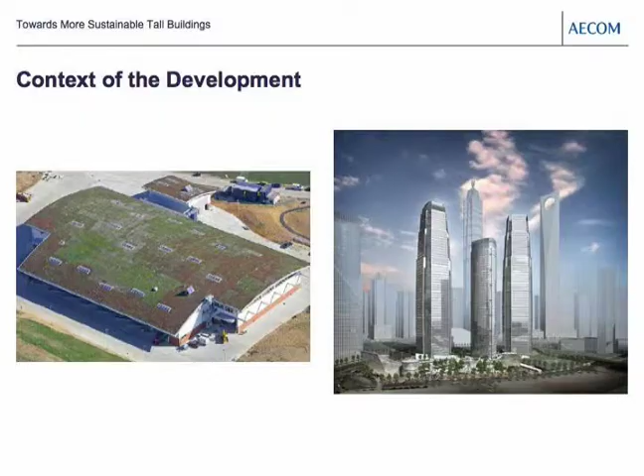On the right, obviously a tall building situation is seen as being less sustainable. In many parts of the world, rapid urbanisation and the need for more resource-efficient cities, combined with land use and transport constraints, means that high-rise solutions can be argued as the only sustainable answer to the need to accommodate large numbers of people within easy access of public transport links.

As such, the development context is therefore key as to whether tall buildings are sustainable indeed. Given this overriding position, what we've got to then determine is how sustainable a particular tall building development can be. In 2002, as Anthony mentioned, AECOM produced a groundbreaking review of tall buildings and sustainability for the Corporation of London. Since that time, of course, globally, there has been a significant change in approach, resulting in many more discussions and solutions of sustainability for tall buildings.

This presentation this morning considers the key drivers of sustainability in the UK, recognising that many of the situations there are now being passed around the world. It identifies major challenges in delivering these sustainable tall buildings, both from a design and operational perspective, and reviews examples of how to achieve sustainability in practice.

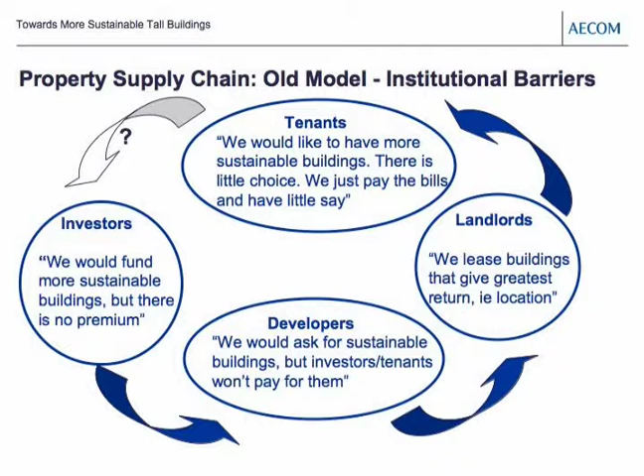If we consider the typical model that was the property supply chain in recent years, traditionally one of the major barriers to adopting a more sustainable approach to tall buildings has been the way in which the various supply chains interact. There are different investor, developer, landlord, tenant relationships, and traditionally tall buildings have often been occupied by a number of tenants, and sustainability has not been the key issue.

Investors are usually looking at short-term returns when it comes to property investment decisions, and they're also being influenced by developers whose focus is on current market rates, as opposed to what may happen as a differential rate where they were looking at a green solution. Developers may well wish to invest in green buildings at that time, but they saw limited financial advantage in doing so, and therefore they also saw the potential of additional risk.

Landlords were driven largely by financial returns offered by a particular building, and tenants who wanted perhaps a green solution were often then constrained by their operation requirements and physical location. I'm pleased to say I think the move in the most recent years is seeing advances in this approach.

In the UK, the government over recent years have been very active, introducing a number of legislative initiatives aimed at addressing key sustainability issues such as energy use and carbon emissions. The documents here are some of the many planning and regulatory initiatives in recent years where AECOM has assisted the UK government with technical advice, helping to set the agenda. For example, the documents are planning and policy statements, Building a Green Future, and Part L building regulations related to energy emissions.

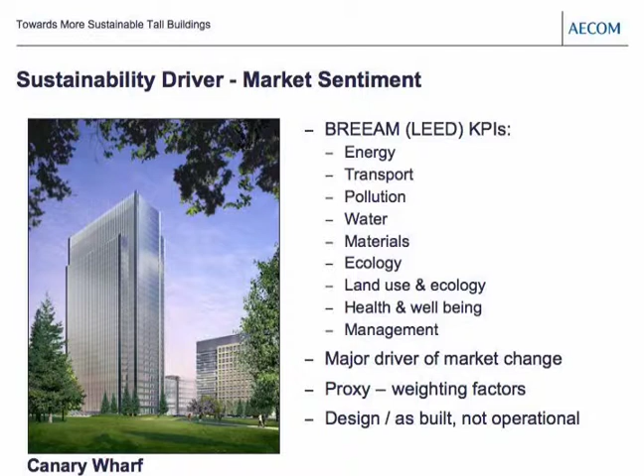However, the BREEAM situation has now developed so that we now check whether the completed building has actually implemented the design features. BREEAM, however, does have some constraints, and there are three. The first is that they are based on a point scheme from the KPIs listed here: energy, transport, pollution, water, materials, ecology, land use, health and well-being, and management. However, there is no particular importance given to any of these issues for a specific site.

Professional practice has not stood still during this momentum shift. And indeed in Europe, I think they've been leading the charge. AECOM has recently helped identify the sustainability requirements by producing this guide for the Chartered Institution of Building Services Engineers. We've also done some work with the HVCA, that's the Heating and Ventilating Contractors Association, on a strategy guide for the industry, and for the RICS, the Royal Institution of Chartered Surveyors, on a sustainable policy for fit-out. As professionals, we can no longer say that we're just providing good practice. It's our duty to advise clients of the need for sustainability within their projects.

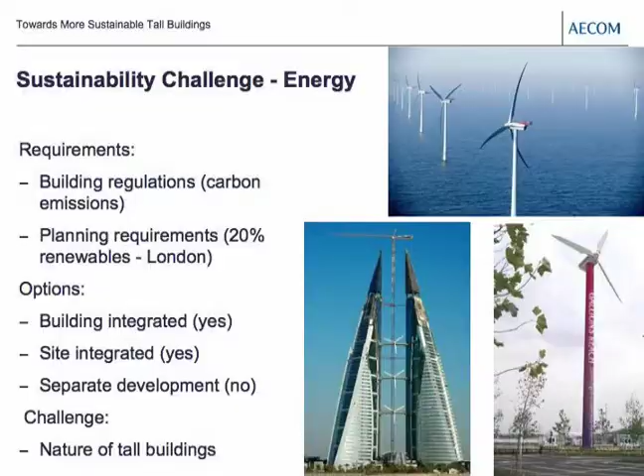Looking now at energy, there are two principal areas of requirements: building regulations, which are centring on carbon emissions in buildings, and planning requirements through regulation demanding 20% renewables from within new buildings. I think when we look at tall buildings, we will find that 20% renewables, as I said earlier, may be unrealistic, but we have to try.

At present, the regulations say that building integrated or site integrated renewables are eligible as part of the London Plan, but the development of far off renewables, for example those from wind farms offshore, would not be calculated within the 20% amount. At the heart of this decision is the vision that within the London Plan they wish decentralised power supply within the city, powered by renewables and low carbon sources.

Many argue against this policy. For example, the cost of reducing carbon emissions through building integrated renewables is often higher than developing energy from offshore wind farms in terms of pounds invested against tonnes of carbon saved. Experience in the UK so far has also shown that buildings with mounted wind turbines often deliver less significant energy supplies. If you can imagine a tall building in the conurbation, it's unlikely that the opportunity to put a wind turbine would exist in that situation.

However, going back to the London Plan, the rationale of insisting that 20% of the energy is from renewables on site is really that they wish to increase the whole process of energy efficiency and awareness, and also create greater innovation from renewable technologies.

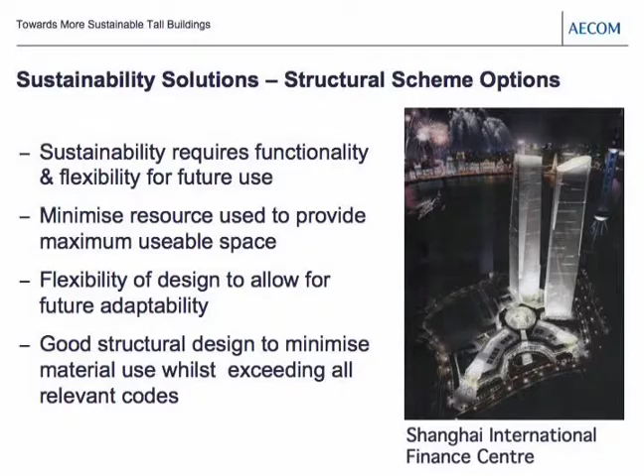If we then turn to some of the solutions. In Shanghai, there is a need for tall buildings because of the rapid urbanization and development. AECOM are the structural engineers on this particular project, the Shanghai International Finance Center. A key requirement of the building to be sustainable is that it meets its function requirements both now and the future. And the future also includes the situation surrounding climate change.

There are many ways the building can be made more sustainable, including energy efficient design, material selection, and overall approach to structural design. As a specific example of sustainability influencing structural outcomes, the following was examined. So, for example, our designers are looking at a range of opportunities, and we have tried to select arguably the most sustainable considered.

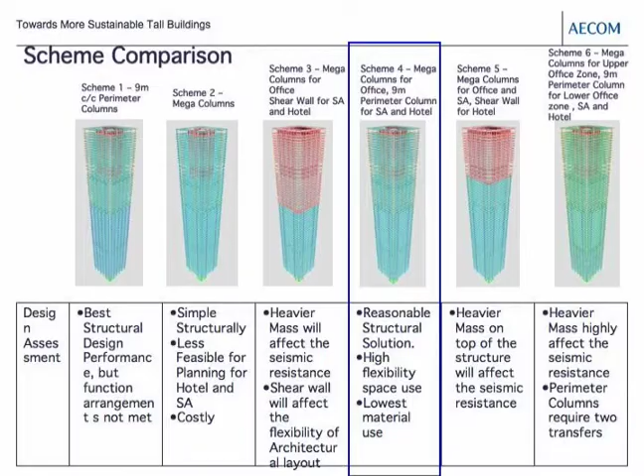I'm sorry you can't read this most probably from the back, but the reasons that we've selected this are: the design gives maximum flexibility in terms of use of the space. The amount of material used in the structure is much less with this option than with the alternatives. And overall, maximising the space and minimising material, whilst giving ultimate flexibility within the building, must be the most sustainable solution. It's also a win-win because lower material costs relate to lower construction costs.

There are obviously many more sophisticated arrangements in terms of selecting materials with lower or different environmental impacts. In the UK, for example, you could argue that the use of steel instead of concrete was more sustainable due to the issues surrounding cement production. For example, 1 tonne of cement in the UK is responsible for 1 tonne of carbon dioxide, whereas the production of constructional steelwork has a relatively low embodied energy because of its high recycled content.

Discussions of this technical nature are always complex. However, it is important to engage in the debate because sustainability is a mindset and we have collectively to find the correct solution. Another potential solution may be reuse of existing foundations. The top picture shows a piling foundation that has been isolated to allow testing before reuse. And below, one of the buildings where we have actually reused foundations, which was Barclays Bank headquarters in London.

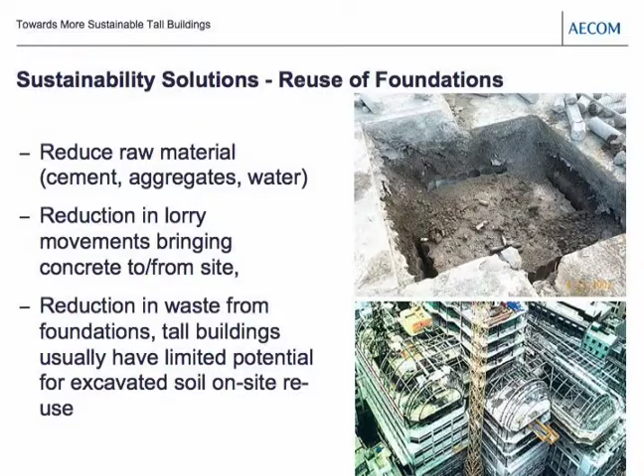Clearly there are limits to this approach, particularly with super tall buildings. The advantages where it's applicable are significant. Reduced material, fewer lorry movements, both of which reduce greenhouse gases. The disruption to communities and traffic movements are reduced. The reuse of foundations reduces soil waste, particularly important where tall buildings are concerned.

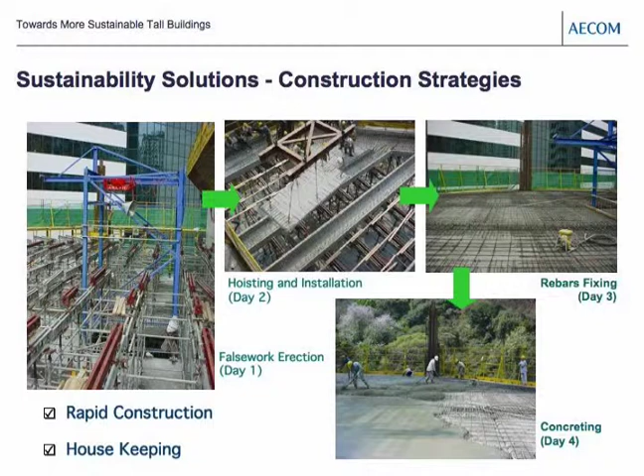Again, looking at the construction, sustainability is not just about energy use and carbon emissions. It's also about using our resources efficiently. Using these resources provides low energy results. This illustration shows a rapid construction technique that minimises material and waste through the use of prefabricated components that results in less waste, greater recycling, fewer journeys to site, all in all contributing to a more sustainable approach. This is only one example, there are many more.

Resource minimisation in construction is also key in tall building sustainable developments. It's essential that the final project maintains the function requirements of the client now and the future. And we have to evaluate the use of materials to provide the best space and the most comfortable living accommodation. Here is an example of a construction approach that aims to maximise the work area within the development.

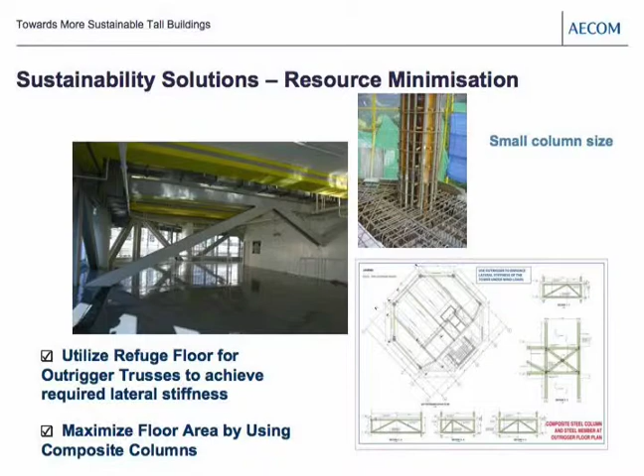Looking now to energy strategy. A development's energy strategy is key these days to meeting planning requirements in London and in many other parts of the UK. Where 20% of the energy is required from renewables on site, the technical opportunities and challenges for tall buildings are different from those found in low-rise buildings.

For high-rise buildings, detailed thermal modelling is needed to minimise energy use and to identify the glazing solutions that provide optimal balance between visual aesthetic, daylighting and solar protection. And the inherent complexity of design and the challenges associated with modelling local wind microclimate also affects the ventilation design.

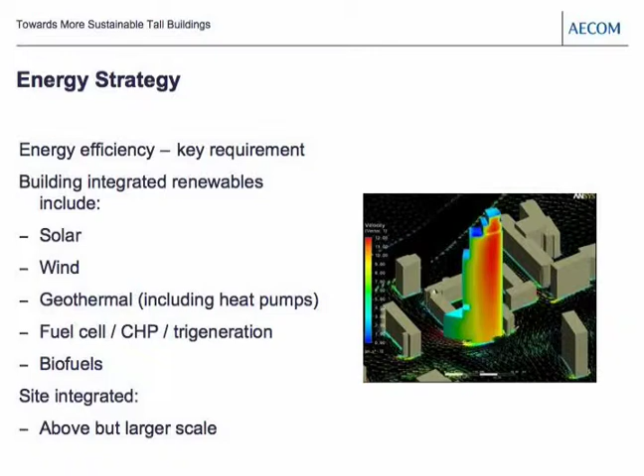There are a range of renewable technologies as listed here, including solar, wind, geothermal, fuel cells, CHP or trigeneration, and the use of biofuels. None are always going to be used on each project, and each project has to be looked at as to the benefits of the use of those renewable technologies.

Mechanical and electrical strategy is key, and we've been hearing a lot, I think, over the last couple of days about architecture and structural engineering, which is key to the success, obviously, of the tall buildings. However, I think it would be inappropriate if we were not to consider that holistic design of a successful building can only be done if mechanical, electrical, and public health matters are considered holistically.

Renewable energy strategy is just part of the building's energy strategy. The carbon emissions from a building can be most effectively minimised by excellent M&E design. It's essential to look at the M&E services and building integrated renewables as part of this holistic solution. Once the concept is developed, its implementation using various high-efficiency lighting, air conditioning and people movement systems, together with good control and management systems, is required to optimise energy use.

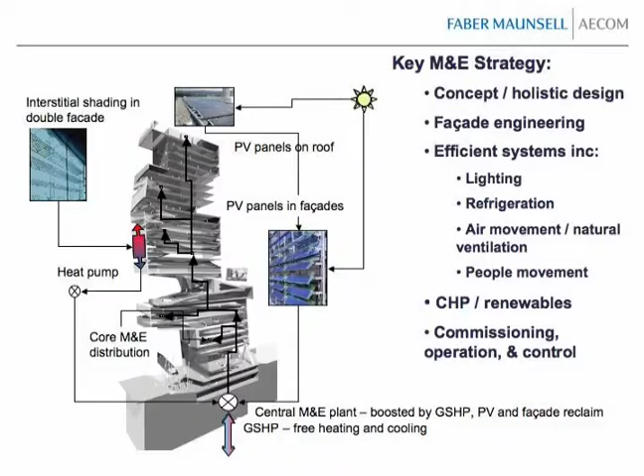And obviously, efficient commissioning and operational issues must be addressed at the design stage. This is an example of a building, cut through a building in fact in Dubai, where we were just doing an analysis of potential energy-saving renewable techniques.

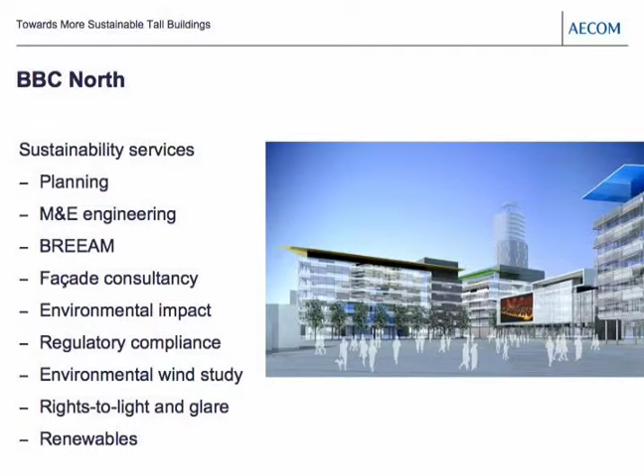Coming to a few examples, the BBC North. The BBC North is in fact a building based in Manchester, where sustainability is to be embedded in all of the mechanical, electrical and public health design and facade considerations from the project. AECOM have provided a range of sustainability services, including environmental facade design, energy and carbon assessments, sustainability consultancy, dynamic thermal modelling, computational fluid dynamics to assist our MEP design to meet their stringent sustainability challenges.

Extensive energy studies of all the buildings were undertaken using dynamic thermal modelling to predict solar gain, daylight levels and energy performance, which enabled an integrated building services strategy to be developed and linked to optimise environmental performance. The hourly analysis also enabled the suitability and feasibility of renewable energy techniques to be assessed in detail. Overall, the team must be very proactive in coordinating a full responsibility for sustainability. Sustainability can only be achieved by team effort.

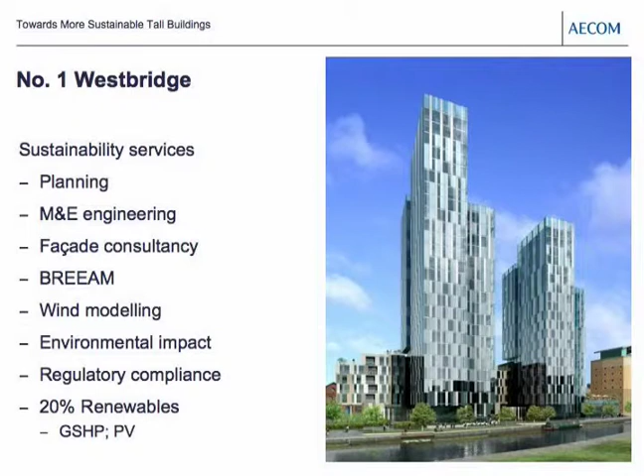This is a high-rise building, high-rise for the UK, I have to say, 30 stories, in Leicester, which is currently in design. In this situation, we're redeveloping on a brownfield site, and we will be providing energy through 20% renewables using ground source heat pumps and photovoltaic cells. We're using the canal to assist the heat source arrangements.

So really, to try and summarise, when we receive a brief for a tall, sustainable building, there are always a number of steps that need to be considered. Communication between the different stages so that sustainability issues and solutions are not lost in the process. The ability of the supply chain to deliver, for example, maintenance contractors need to understand the specialist equipment and the occupants to understand how the building operates.

In conjunction with the various property owners, AECOM have produced a set of guidelines called Managing and Operating Buildings Sustainably, which detail the processes, training and awareness schemes that are necessary for sustainability to be optimised in practice. The critical factor in this process is the creation of a feedback channel that enables occupants and operational staff to inform design and construction teams as to how their ideas have actually worked in practice.

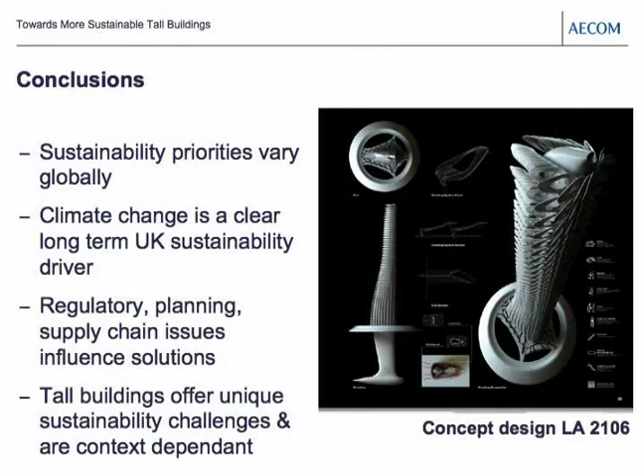In conclusion, sustainability priorities vary globally. In the UK, climate change is certainly high on the agenda, and both adaptation and mitigation of climate change are important sustainability issues. Regulatory and planning and the property and construction supply chain issues must dictate solutions and work together. Sustainability is increasing not only in the UK, but also around the globe, as mirrored by this conference. Tall buildings certainly offer some unique challenges, and it's up to us to make sure that we can deliver that in the context dependent.

The building on the right is in fact a concept building, and it was envisioned by AECOM in their submission for the US television programme on future cities. The concept building is called the Stratosphere, 4 times as high as the tallest building, and was the concept of a building for Los Angeles in 2106. This concept foresaw the building having a photosynthetic skin, enabling it to collect solar energy, harvest water vapour from coastal fog, produce oxygen and process carbon dioxide. As a concept, it would act as a giant carbon-negative organism for the city.

This might all sound very far-fetched, but as an industry, we need to look into the future, not just to look how we can design and build taller, quicker and cheaper, but also more sustainably.